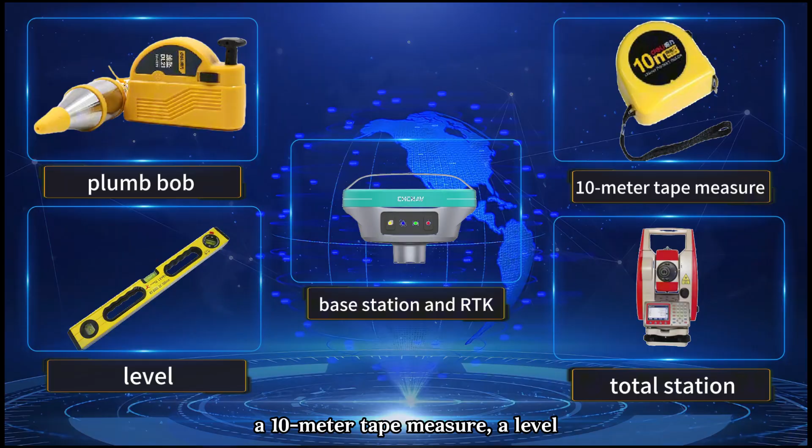Preparing the calibration tools. Before starting the calibration, please prepare tools such as a plumb bob, a 10-meter tape measure, a level, a total station, base station, and an RTK tool.

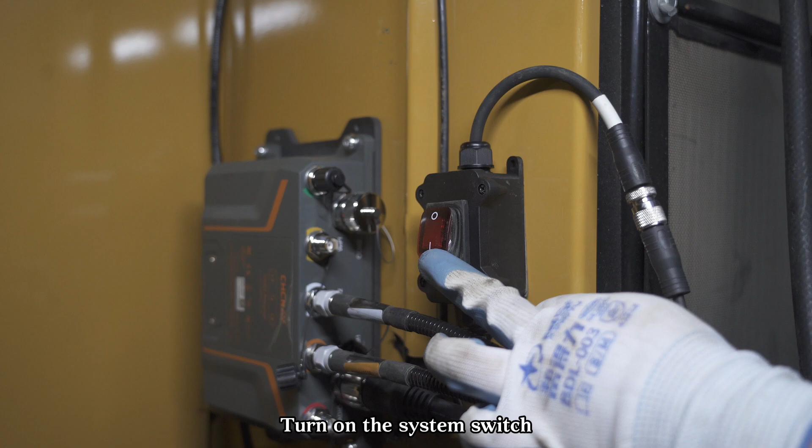Calibration preparation. Boot up the system by turning on the system switch. The software will start automatically after booting up.

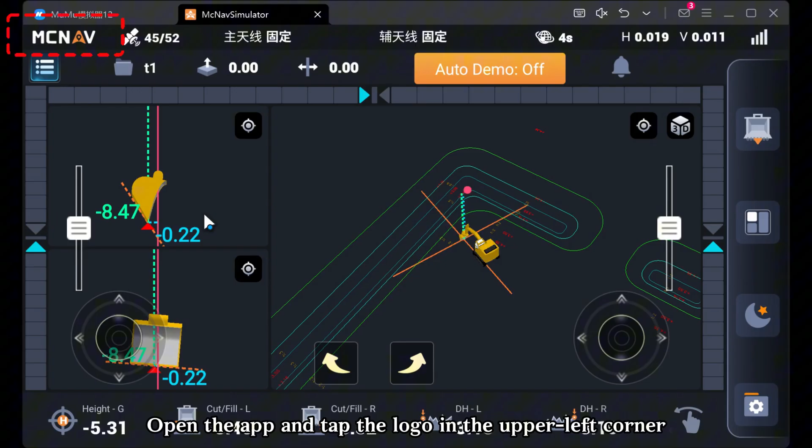Software registration. Open the app and tap the logo in the upper left corner. Select offline code, choose the imported registration file, tap import, and then tap register to complete the process.

Software upgrade. Click the upgrade button to perform an online upgrade. Please make sure the tablet is connected to the internet.

Calibration area selection. Park the excavator on a flat, open area, ensuring there is enough space for the body to rotate and the boom and stick can extend fully.

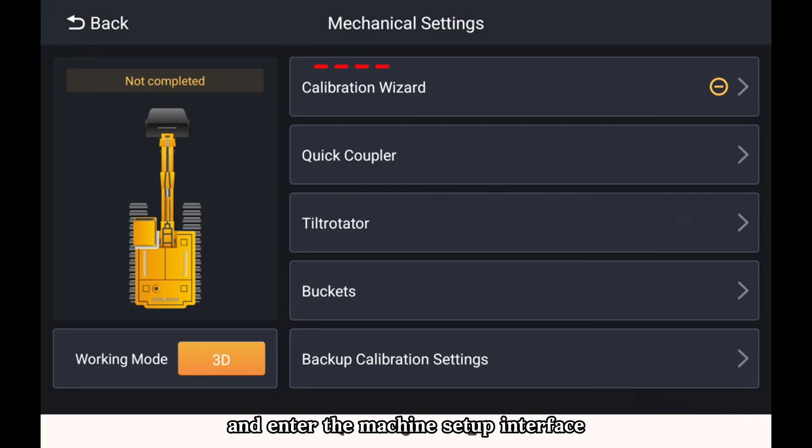Click on Calibration, click on the calibration wizard, and enter the machine setup interface. Confirm and select the type of configuration, whether there is a quick coupler, whether there is a tiltrotator, the installation size for sensors, and the attachment sensor installation position, then click Next.

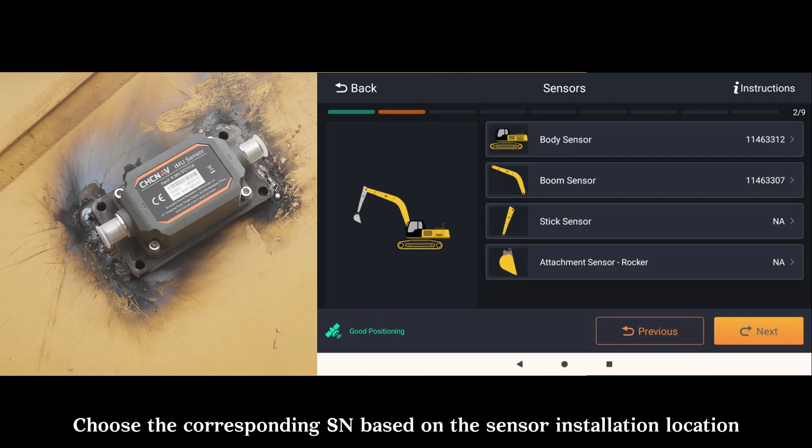Sensor configuration. Choose the corresponding SN based on the sensor installation location. After the configuration is complete, click Next.

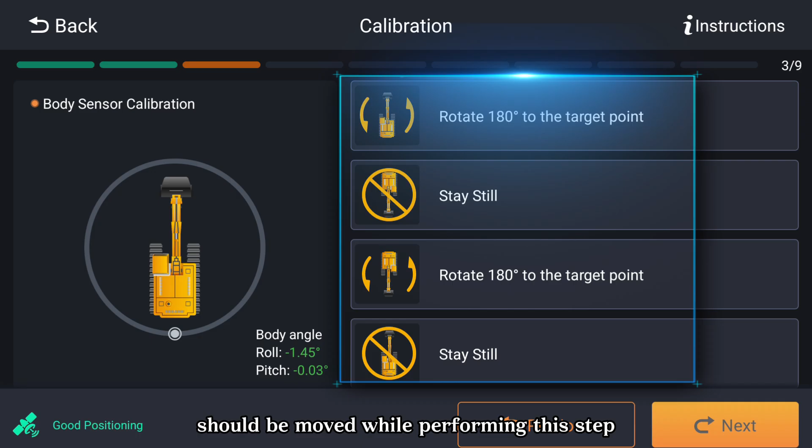Mechanical measurement and calibration. Body sensor calibration. Before starting this step, please note that the roll and pitch angles of the body sensor should remain within 2 degrees. In this step only the vehicle body should be rotated; no other parts of the machine should be moved. Move the excavator so that it is possible to do a full 360-degree turn without moving any other parts.

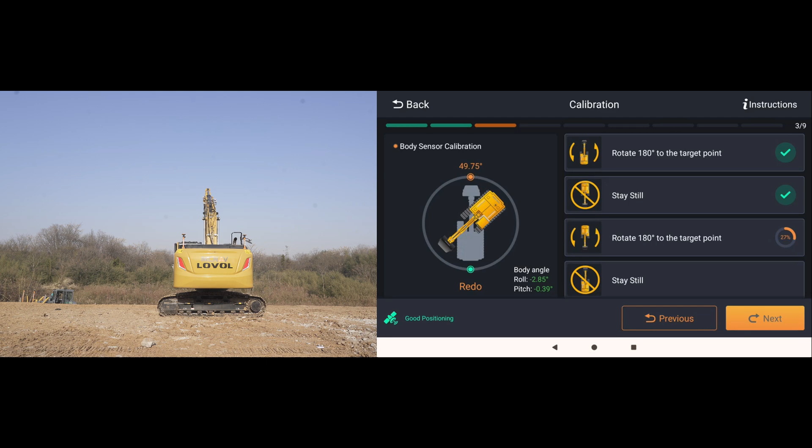Rotate the excavator 180 degrees, then remain still. Continue to rotate 180 degrees in the same direction, then remain still. After the calibration is complete, click Next to enter the boom sensor calibration interface.

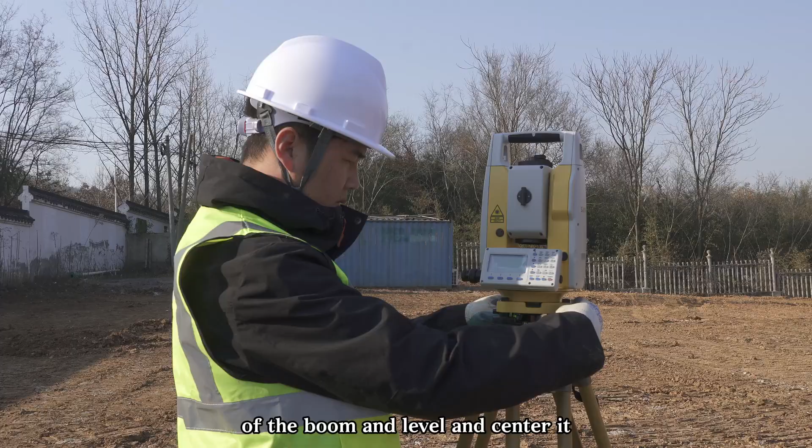Boom sensor calibration. Set up the total station in the middle position of the boom and level and center it. Adjust the boom until the connecting line S1 is leveled horizontally, then click the Calibration button.

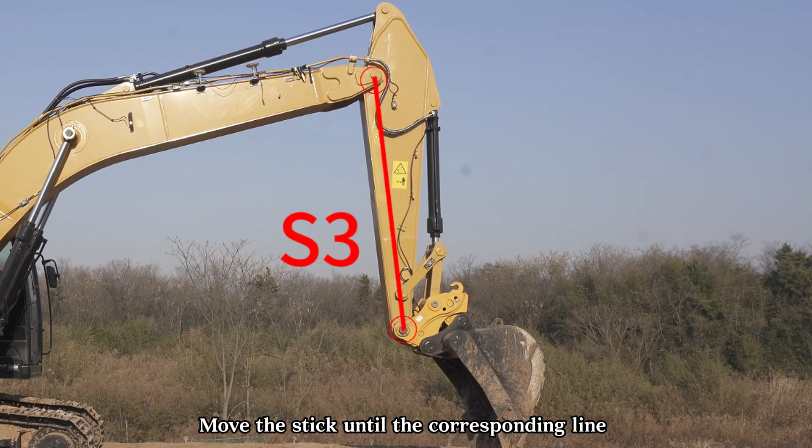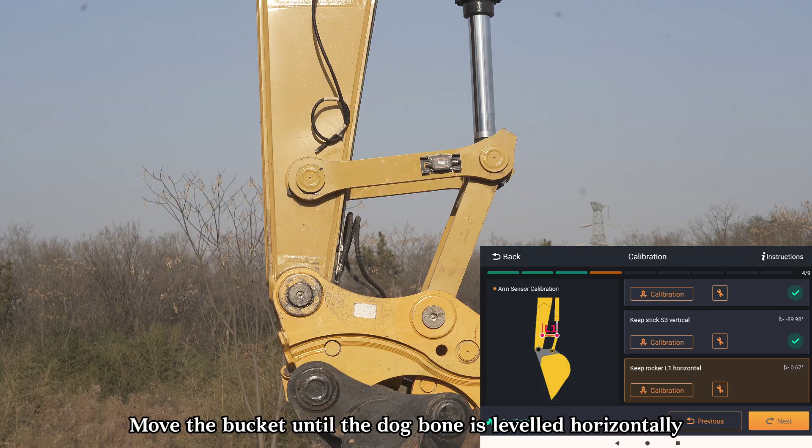Stick sensor calibration steps: Move the stick until the corresponding line S3 is leveled vertically, then click the Calibration button. Dog bone sensor calibration steps: Move the bucket until the dog bone is leveled horizontally, then click the Calibration button.

After the calibration is complete, click Next to enter the size measurement interface.

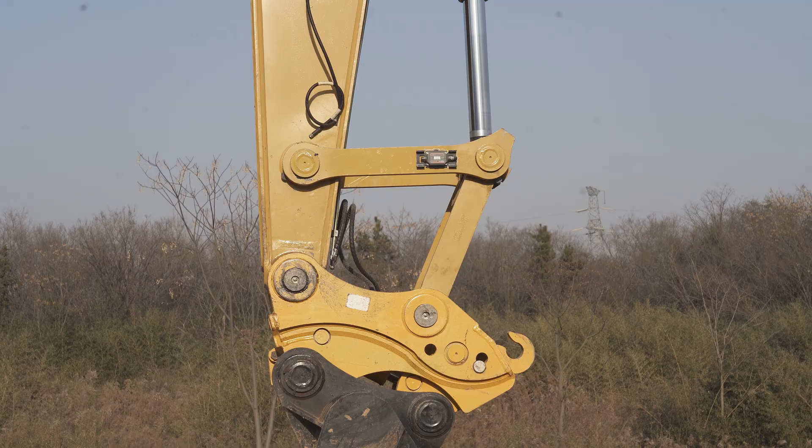Size measurement. When measuring the dimensions presented in this interface, try to be as precise as possible, aiming for millimeter level accuracy. Either a tape measure or total station can be used to collect the measurements.

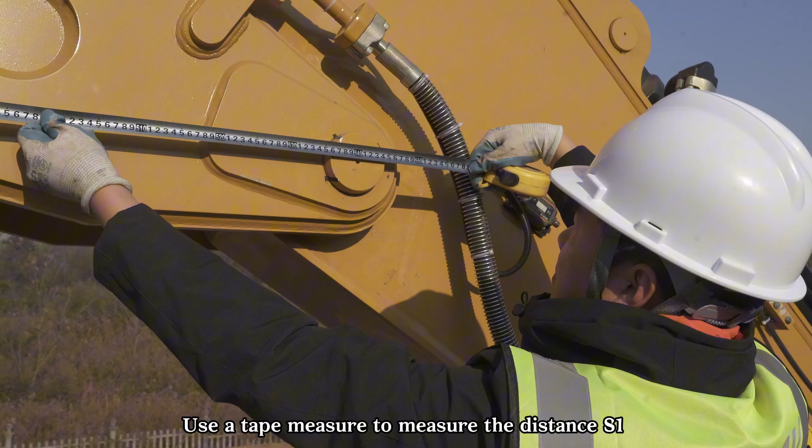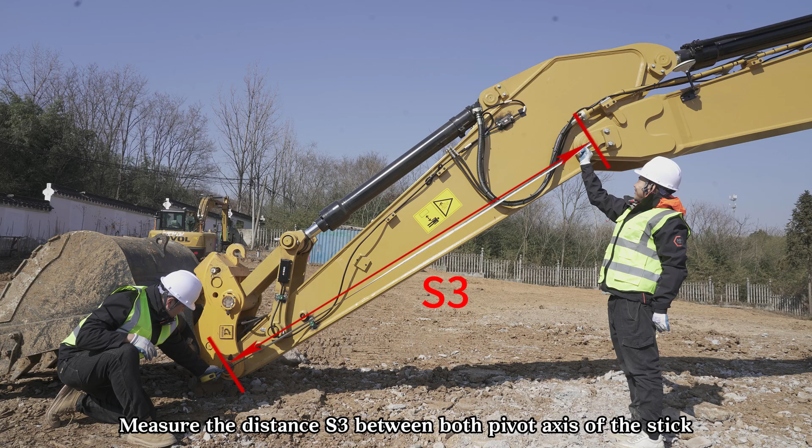Use a tape measure to measure the distance S1 between the pivot axis of the boom and body and the pivot axis of the boom and stick. Measure the distance S3 between both pivot axes of the stick.

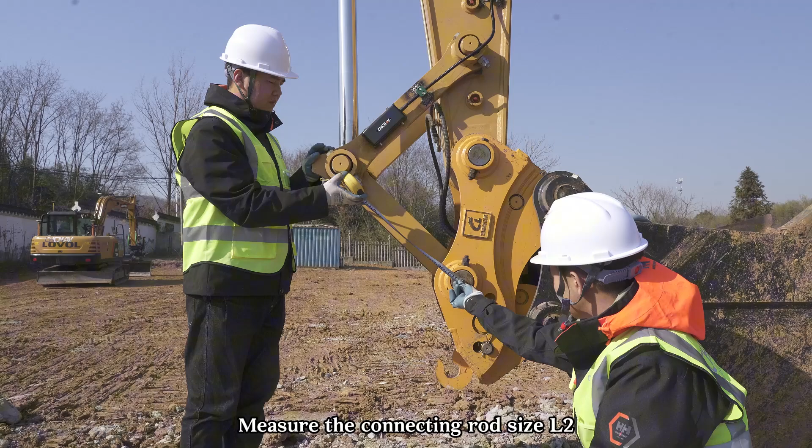Measure the connecting rod sizes L1, L2, L3, and L4.

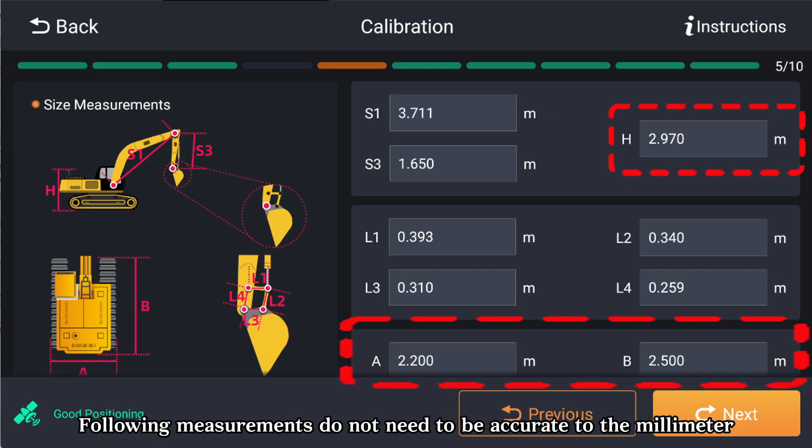The following measurements do not need to be accurate to the millimeter. These are used to scale the model of the machine on the screen. An accuracy of 10 centimeters is okay.

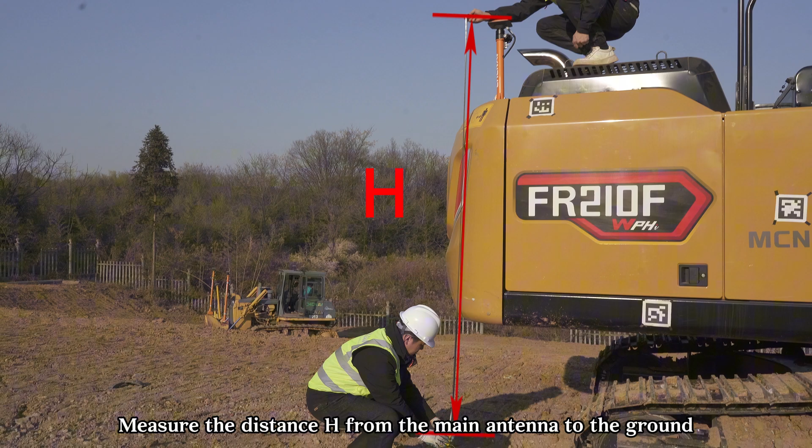Measure the distance H from the main antenna to the ground. Measure the width of the track, A. Measure the length of the track, B.

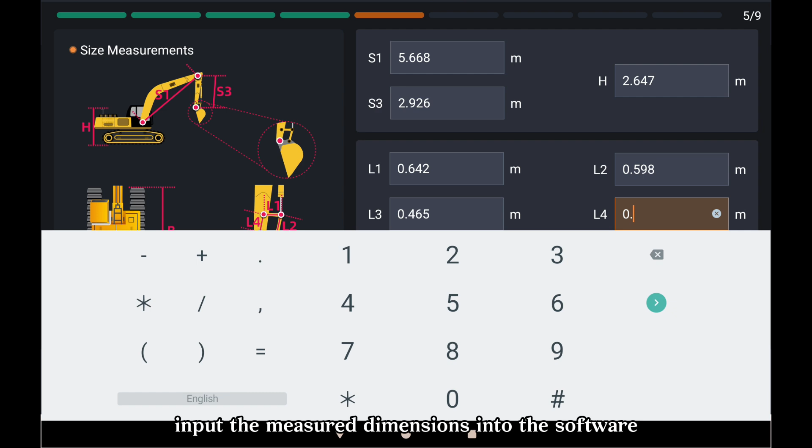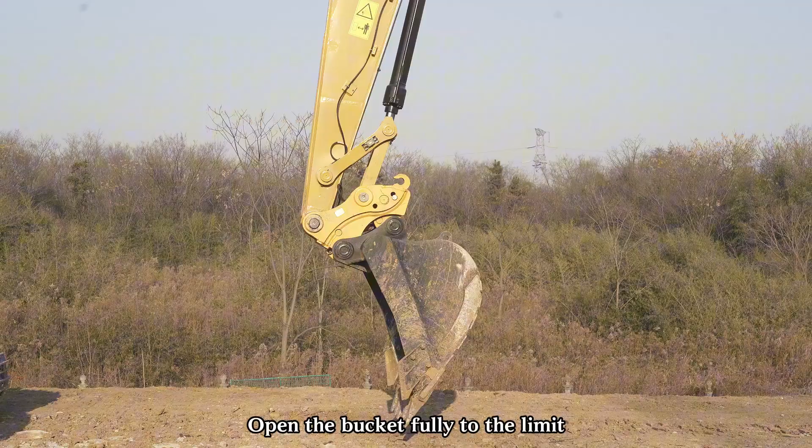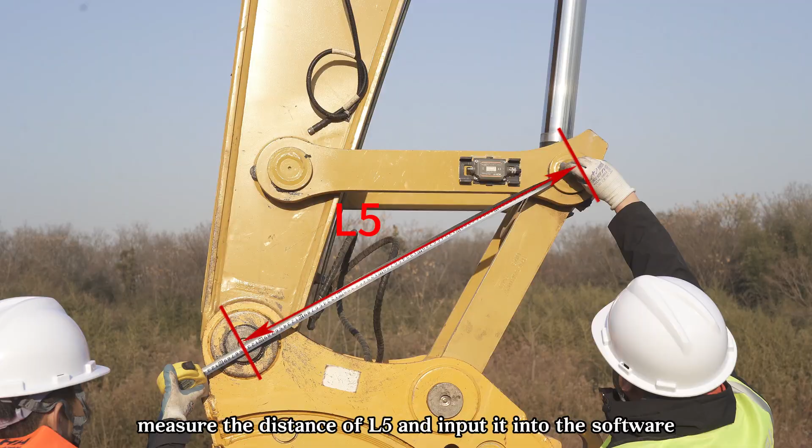Open the bucket fully to the limit, measure the distance L5 and input it into the software, then click the Calculate button. Adjust the bucket to approximately the center position, measure the distance of L5 and input it into the software, then click the Calculate button.

Close the bucket fully to the limit, measure the distance of L5 and input it into the software, then click the Calculate button.

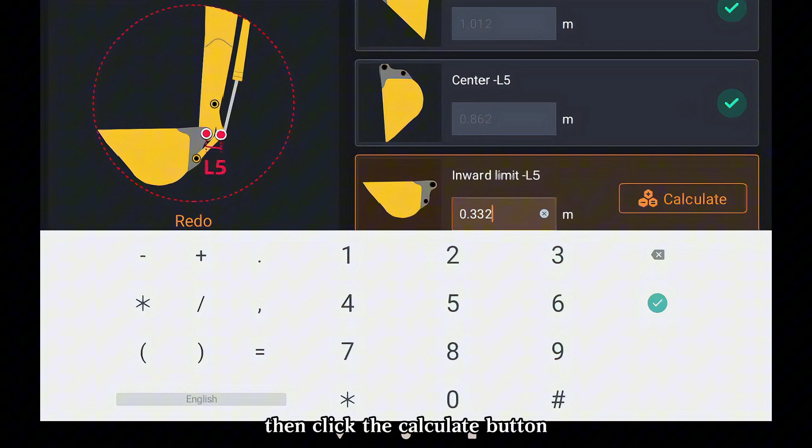Note, if you cannot pass this step, please recalibrate the stick and dog bone sensors and recheck the dimensions L1 to L4. Recheck the connecting rods measurements. Click Next to enter the interface of arm checking.

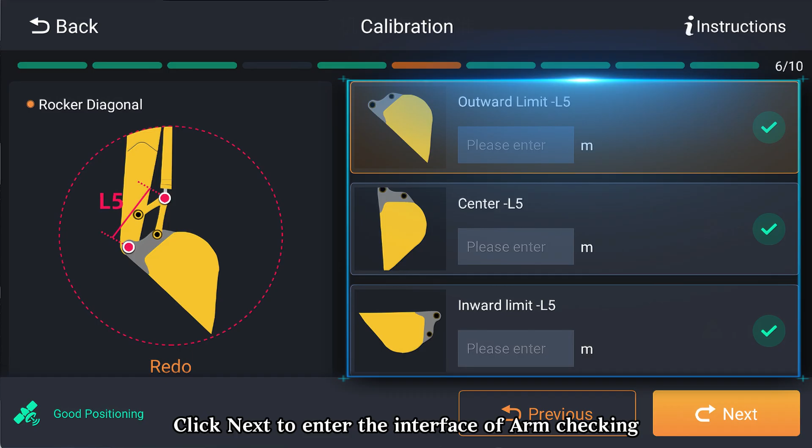3.7 Arm checking. Open the bucket to the limit. Adjust the stick to almost vertical. Place the blade to the ground. Measure the distance S5. Input it into the software and click the check button.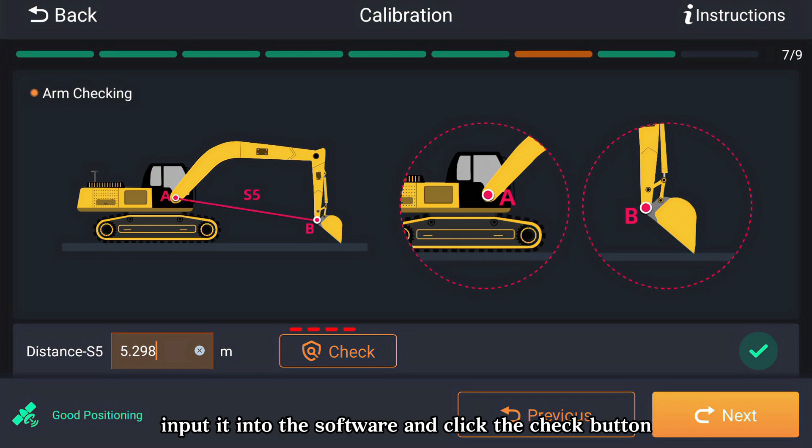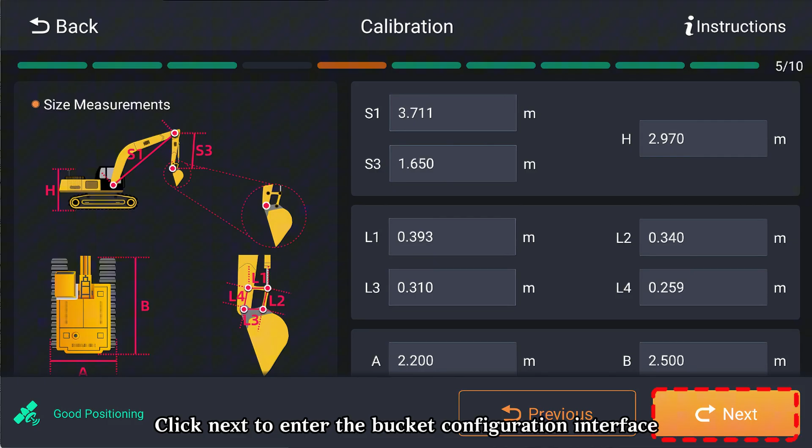Note, if you cannot proceed through this step, please recalibrate the boom sensor and make sure the dimensions S1 and S3 are correct. Click Next to enter the bucket configuration interface.

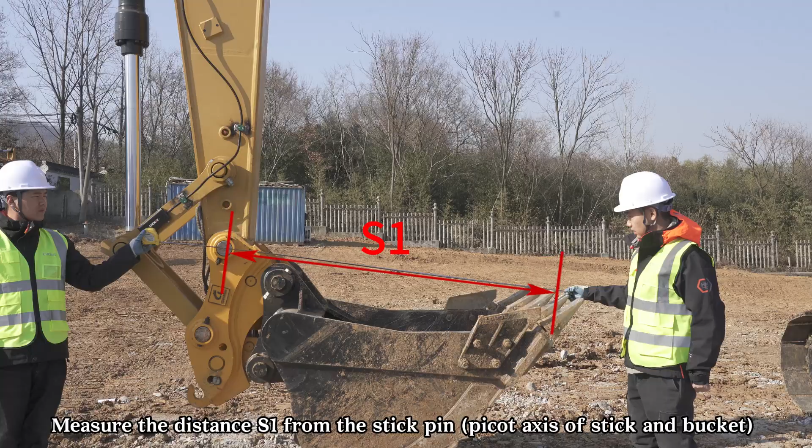3.8 Bucket configuration. Click Create button to create a new bucket. Enter the bucket name and select the corresponding bucket type. Measure the distance S1 from the stick pin pivot axis of stick and bucket down to the bucket blade edge.

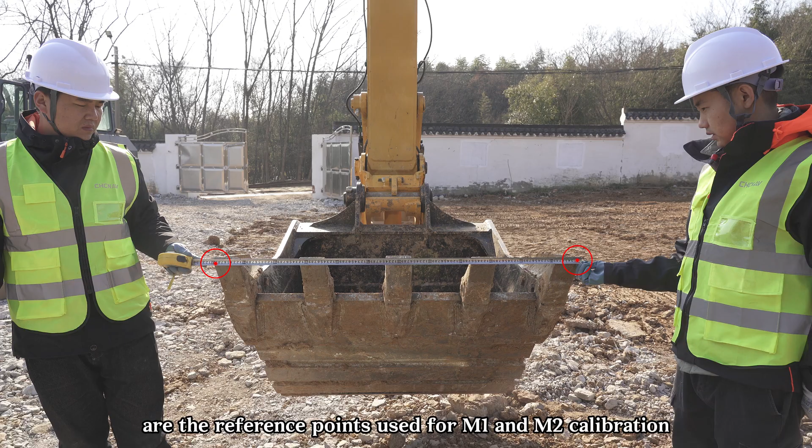Measure the width of the excavator bucket W1. Note that these 2 points are the reference points used for M1 and M2 calibration. Input S1 and W1 in sequence.

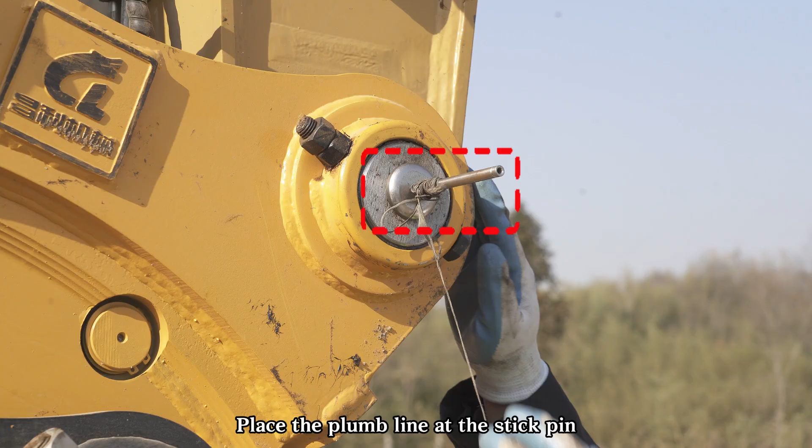M calculation. Place the plumb line at the stick pin and adjust the bucket so that stick pin and bucket blade edge line up vertically. Then click the M calculation button.

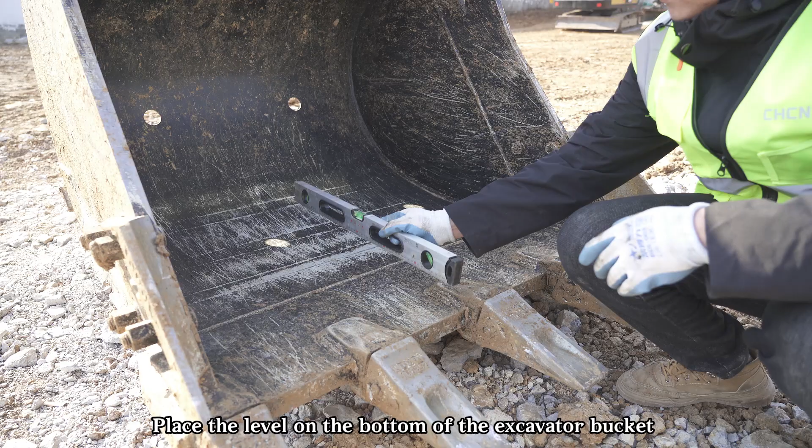Angle B calculation. Place the level on the bottom of the excavator bucket and adjust the bucket so that the bubble in the level is centered and the bucket bottom is leveled horizontally. Then click the B calculation button.

Click Save. Select the excavator bucket and apply. Click Next to enter the antenna calibration interface.

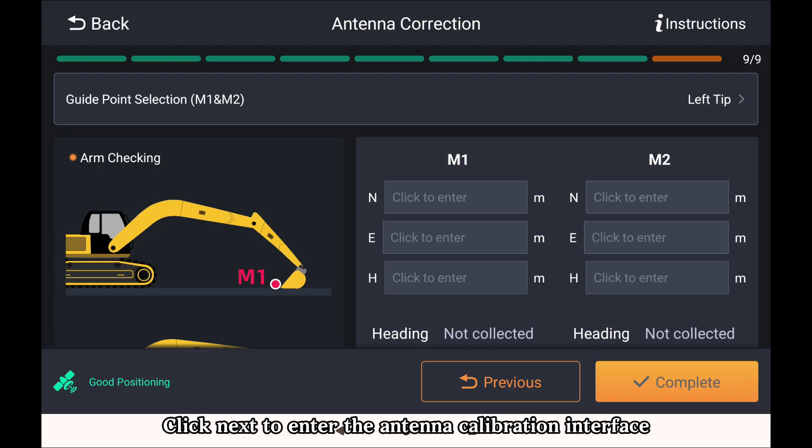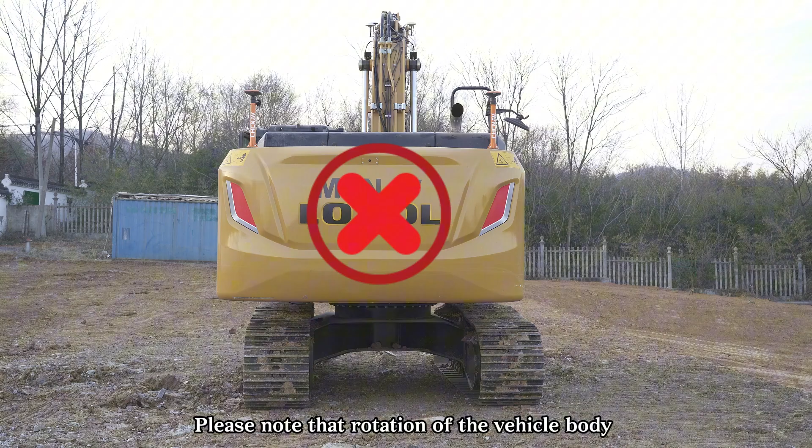3.9 Antenna calibration. Please note that the RTK in this step needs to use the same coordinate system as TX73. Please check the parameters within the coordinate system. Please note that rotation of the vehicle body is not allowed during this process.

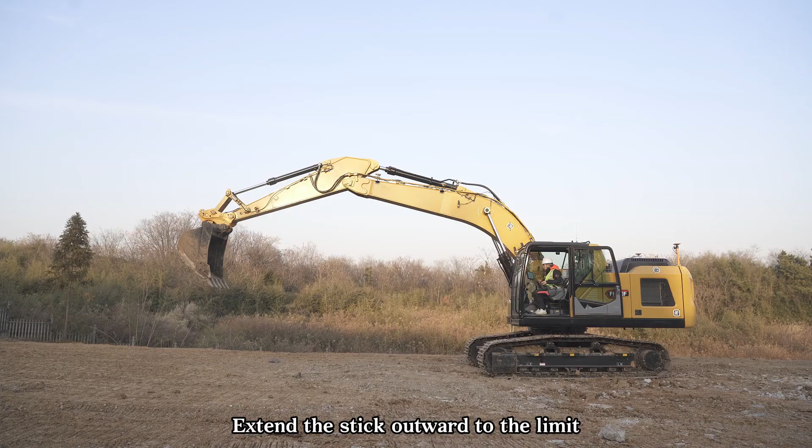Please make sure not to lift the vehicle body with the excavator bucket when placing it to the ground. Extend the stick outward to the limit, with the bucket tip touching the ground, and use an RTK rover to measure the coordinates of the left bucket tip.

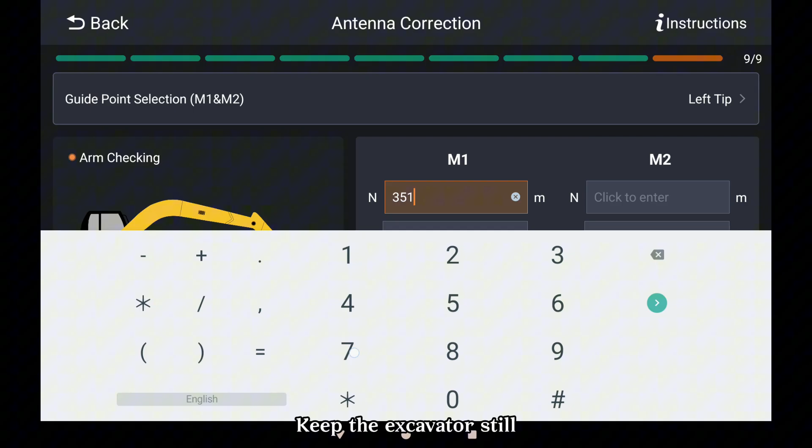Keep the excavator still. Input the coordinates of M1 and click the Collect button.

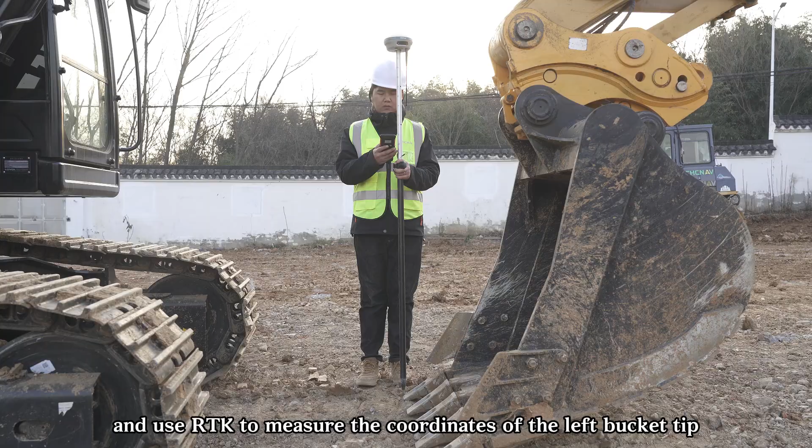Then bring the stick as close to the cab as possible, with the tip of the bucket touching the ground, and use RTK to measure the coordinates of the left bucket tip. Keep the excavator still. Input the coordinates of M2 and click the Collect button.

When the heading difference between M1 and M2 is within 0.2, the calibration error should be about 3 to 4 centimeters, and the larger the heading angle difference, the greater the error will be.

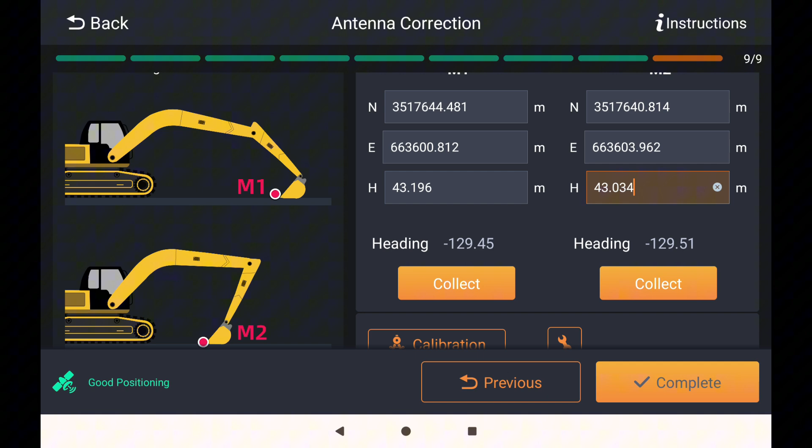After input and collection are completed, click the calibration button. The system will provide the calibration results. When the residuals of M1 and M2 are within 3 centimeters, it indicates that the calibration accuracy is good enough to pass. Click the Confirm button, then click Complete.

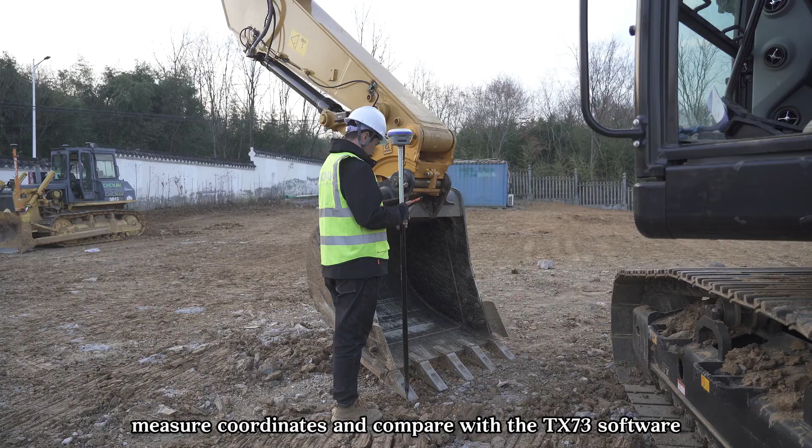4. Accuracy check. Rotate the excavator. Adjust the boom and stick to different postures. Measure coordinates and compare with the TX73 software. If the error in the north, east and height is within 3 centimeters, it indicates that the calibration has been successfully completed.

Please use at least 3 different postures bucket locations around the machine for coordinate accuracy verification. 5. Backup calibration settings. After the verification is completed, backup calibration settings in the calibration menu.

At this point, the calibration of the TX73 excavator 3D guidance system is complete.